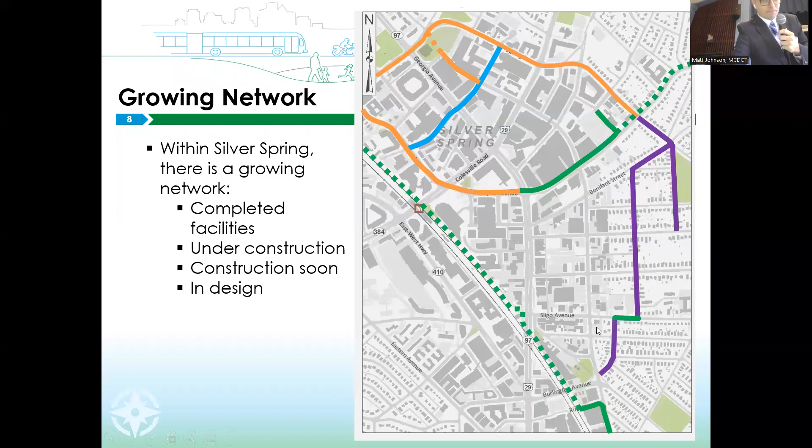And then in final design, we have the Fenton Street cycle track, which is getting very close to final design. We do expect to have a community meeting about that project in the near future. That will connect the north part of the CBD all the way down through Fenton Village to the Metropolitan Branch Trail.

And we have a few other projects that are in planning, including the Dixon Avenue separated bike lanes that will run along Dixon Avenue from Wayne Avenue down to Silver Spring Avenue. And the 13th Street Burlington Avenue project, which is about to get started. We'll have a community meeting about that in the fall, likely. That project we have funding starting July 1st for, and that will help connect South Silver Spring to Fenton Village. So as you can see, there's a growing network of low-stress bike facilities.

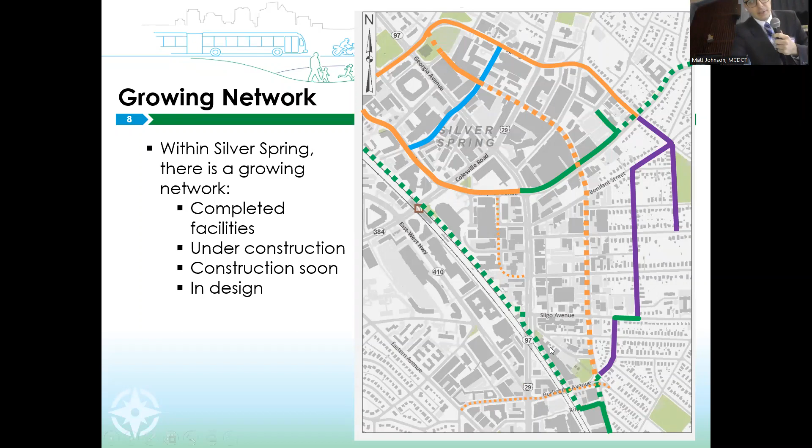And I do want to point out that all of these bike projects are also about pedestrian safety. They're not just about facilitating bike movement. We also always incorporate pedestrian improvements as part of these projects to improve safety for all users. So this is a growing network. It's not just an isolated project. This is part of a larger network.

Now, I've talked about the East Silver Spring Neighborhood Greenway, and those of you who've been involved in the project have probably seen this slide before and have probably heard this definition a whole bunch, but what is a neighborhood greenway, for those of you who might be new to the project? A neighborhood greenway is a street that is designed to give walking and biking priority and to reduce vehicle speed and volume. Tools used to create a neighborhood greenway include signs, pavement markings, speed countermeasures, volume management measures to discourage cut-through trips by vehicles, and also tools to create safe and convenient crossings of arterial streets for bicyclists and pedestrians.

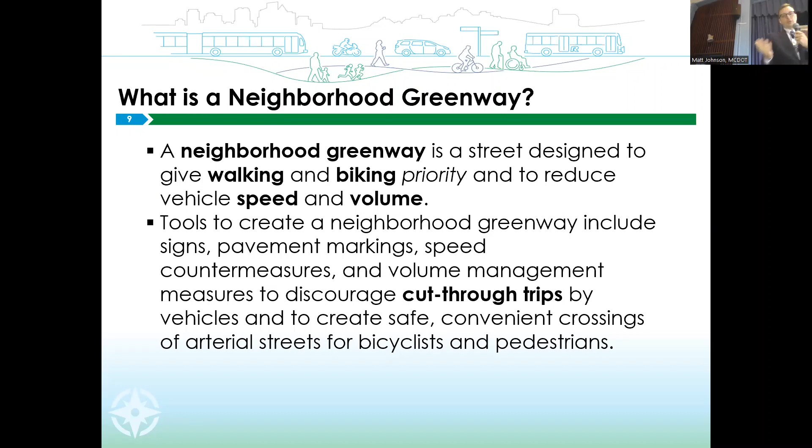So we don't necessarily have to do all these treatments in all the places. It's a toolbox, and we use the correct tools in the correct locations, and also based on community feedback. So these are just some examples of treatments that are used in neighborhood greenways. Things like speed cushions, neighborhood traffic circles, chicanes, but also chokers, curb extensions or bump outs. We also have diversionary treatments.

Now, I want to just go ahead and point out that we are not proposing any diversionary treatments as part of this project. I'm including them on this slide because you may be involved in other neighborhood greenway projects in other parts of the county. We may have diversionary treatments on those projects. We're not proposing them on this project, but those include things like having a partial closure where the street might be made one way at one end of the block. So drivers can't enter, but cyclists and pedestrians can. But the street's not fully one way.

So if you have a driveway on that street, for example, you could leave your house and go away from that closure. Or a full closure where we actually do close the street, kind of make it a cul-de-sac, or a right in, right out, where we make everyone turn right instead of going straight across. So those are some examples, but again, we are not proposing diversionary treatments on this project. I just wanted to give the full context that those are in the toolkit for other projects.

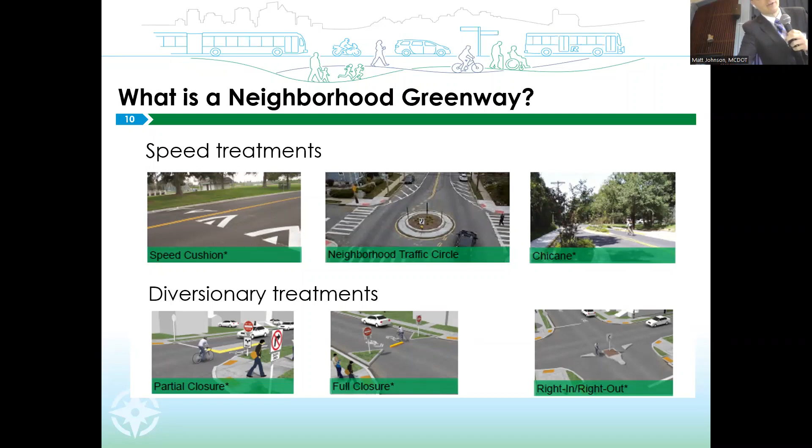And I just want to give an overview of this project. So as I mentioned, we've seen this map before, but this just shows those connections in black at the south and north end to show this is part of a larger network that we're building that connects to other projects.

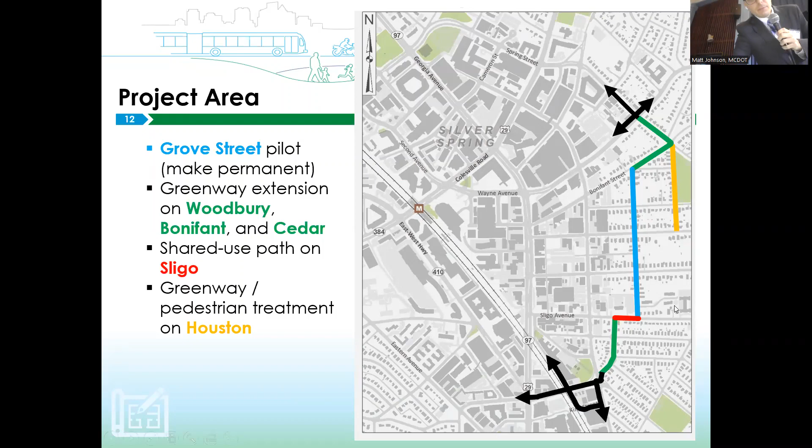So I also want to point out that these are very conceptual plans. We don't have concrete proposals for you right now because we're here to get your feedback. So we have some ideas. We've just talked about some of the treatments that are in the toolbox. The plans you see here have some conceptual ideas of where we might want to put a speed cushion or where we might want to build a bump out. But these are not concrete at this time. We want to get your feedback.

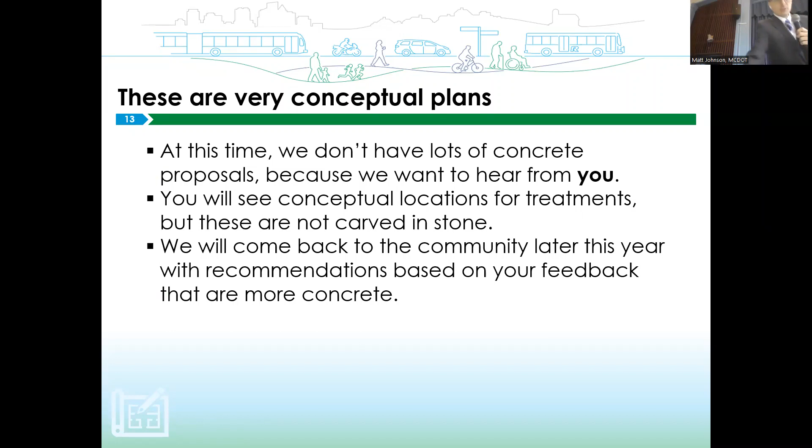We're going to come back probably in the fall with some more concrete plans that you can comment on based on the feedback that we get from this process. So keep in mind that nothing is set in stone at this point. We really are here to get your feedback. I'm going to start at the south end of the project and work my way north. And again, anything you see here, nothing's set in stone. So we would love to get your feedback on individual elements.

So Woodbury Drive does have a connection to the Metropolitan Branch Trail and the future 13th Street Burlington Avenue bikeways at the south end. There's currently a small sidewalk connection from the south end of Woodbury over to the sort of big intersection of Fenton and Philadelphia and Burlington. We have a separate project. I'll show a map of it in just a minute. We have a separate project that is going to reduce the size of that intersection, improve that connection, but this is part of that connection. So it is a dead-end street for drivers, but it's not a dead-end street for pedestrians and cyclists.

We're not really proposing a lot on Woodbury. It's mainly signage, things like a bike route sign that might say bike route, go this way. That way you don't get lost in the neighborhood. Or sharrows to help reinforce to drivers that, hey, cyclists are going to be here and you should watch out for them. So it's primarily wayfinding treatments.

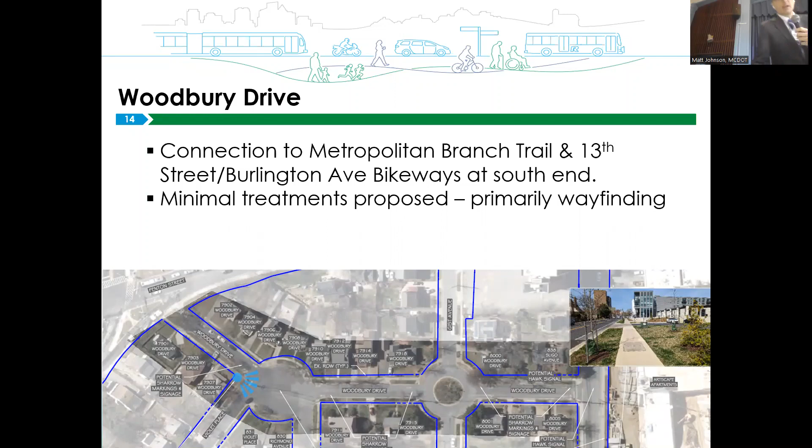One of the things that we are considering, and we would love to get your feedback on, is the same treatment that we did at Gist Avenue to add that green circle, which we worked with the community on several years ago. I was just talking to Bob about that. I think it was before I was at DOT, but it was a couple years ago. For reference, I've been at DOT for 7 years. So if it was longer ago than that, it was before I was on the team.

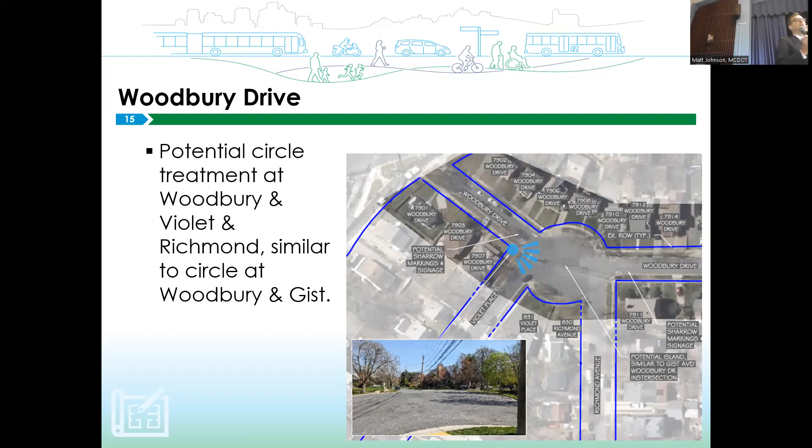But we're looking at a similar kind of treatment at the big circle that is where Violet and Woodbury and Richmond come together. So that might be one option to kind of get rid of that asphalt, make it a little greener, but we want to get your feedback about it.

And then I did mention that other project. This is the Fenton Street Maryland 410 intersection project. It's basically been rolled into the larger Fenton Street cycle track project at this point. But the main goal here is to remove these high-speed right turn ramps, make the intersection a little more compact. It also allows us to put in some stormwater management features to improve our water quality in the area.

And the main point that I want to mention here is the connection is going to be a shared use path connection here between Woodbury and that smaller intersection. And cyclists who want to get to the Metropolitan Branch Trail or pedestrians can use either crosswalk really, but the north crosswalk is sort of the intended crosswalk. And just for reference, north is to the right in this image. So Montgomery College is down to the left, and downtown Silver Spring is off to the right.

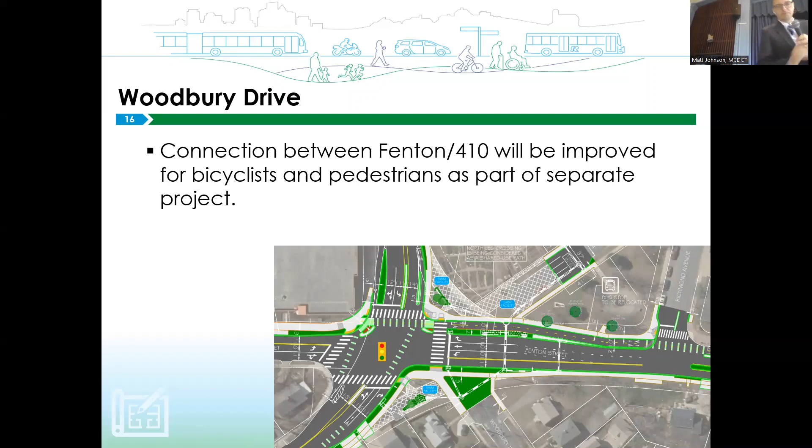Up on Sligo Avenue, there's currently no marked crossing of Sligo Avenue at Woodbury today. And it's a pretty stressful crossing, or could be, given the traffic volumes and speeds. And if you're a bicyclist, Sligo Avenue would be a very stressful place to ride.

Now, I'll say I drove here from Rockville today, and there was a cyclist biking on Sligo Avenue, and he was trying to ride as far to the right as he could so the driver could go around him, but I really didn't feel like I wanted to pass him because it really felt very, very close. So I drove really slowly and let him go on, but it's a pretty stressful place for most cyclists to ride.

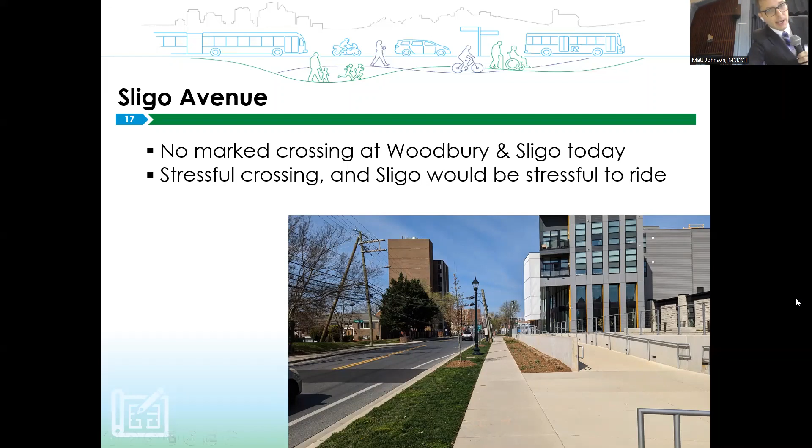So what we're proposing, we have two options, which you can see over on the boards here against the wall to your right, or if you're on the Zoom, you can see that on the website.

Sorry, I have to hide this again. Anytime someone joins the meeting on Zoom, that pops up again.

So that's the issue. So we're proposing to build a shared use path on the ArtSpace side. That's what we call option one on those plans over there. And this would be widening the sidewalk essentially toward the ArtSpace building. So I had some discussions over here before.

Just to be clear, this would not narrow Sligo Avenue. Sligo Avenue, just for cars, what you see today with one lane going one direction, one lane going the other direction, and parking, all that's going to be unchanged. That would not impact the amount of space you have. We're not narrowing the roadway. We're not removing parking with this option.

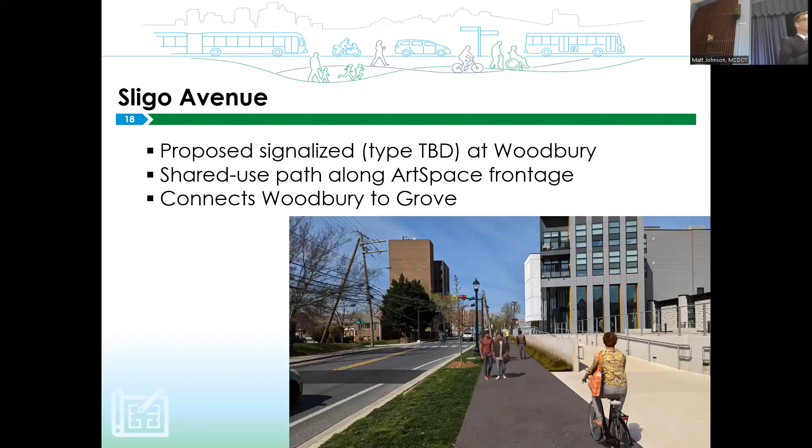And this would also include some kind of signalized crossing at Woodbury, so that people can have maybe a HAWK signal, maybe a flashing beacon, some kind of signal to indicate to drivers that people want to cross here. And that would make it so that you can cross from Woodbury over to the shared use path, go a block on the shared use path, and then make a left on Grove Street, or vice versa, to continue on the Greenway.

Now, there is another option, which we included just for the sake of having a discussion, because potentially it might be a preferable option. So the northern option is shown in green on the screen here, with the crossing at Woodbury. But we also were looking at a southern option where the crossing would be at Grove Street instead. This would require removing all of the parking on the south side of Sligo Avenue between Woodbury and Grove.

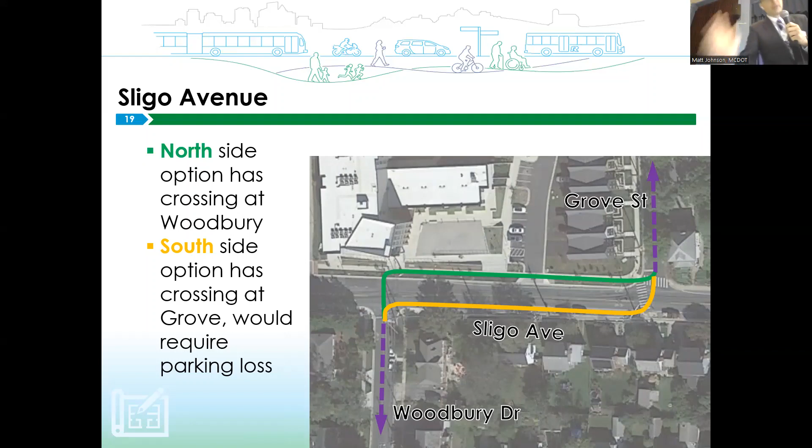So I suspect the community is probably going to favor the north option rather than the south option, but we're here to hear your thoughts. And if you disagree with that, please feel free to let us know. But we're currently operating under the assumption that the north option is probably going to be the option that people like more. But again, we want to hear your thoughts.

As we move on up to Grove Street, these treatments are largely already in place, but they're interim treatments. So you can see here the interim speed hump, the speed cushion here, and also the walking lane. These were never intended to be permanent. They were intended to be temporary treatments that we could use to test out things and see how it worked and see how the community liked it.

And they can't stay here forever because they're not super resilient to snowplows. Like I think in Miami, these things probably could stay forever, but up here we do get snow occasionally, and the snowplows do a lot of damage to stuff that sticks out of the roadway. So we want to replace these with things that are going to be resilient and will last long term.

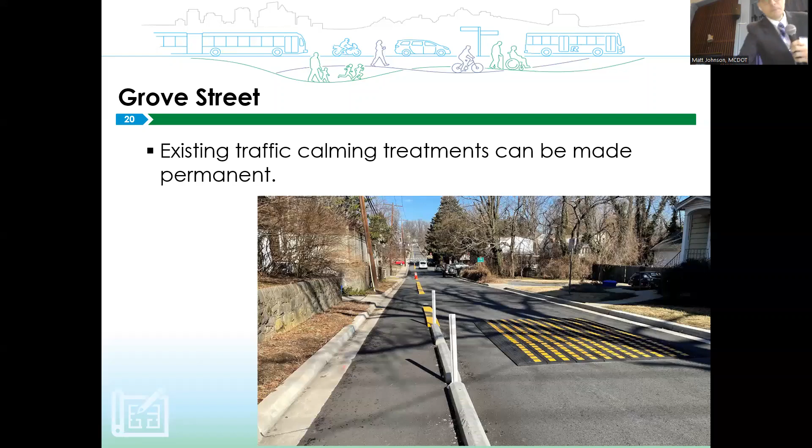So we're not saying that everything that's out there today has to stay. We'd love to hear your feedback about things that are working, aren't working, things you think maybe, hey, if you move this over 50 feet, it would work better. Those are the kinds of comments we would love to get about Grove.

We are planning to remove this mini roundabout, although again, if you think it should stay, we'd love to hear that too. But the intersection is just a little bit too small. We wanted to try it out and see how it would work, but it's just a little too tight to make it work in this instance. And we are planning to remove this. But again, if you disagree, please feel free to let us know about that as well.

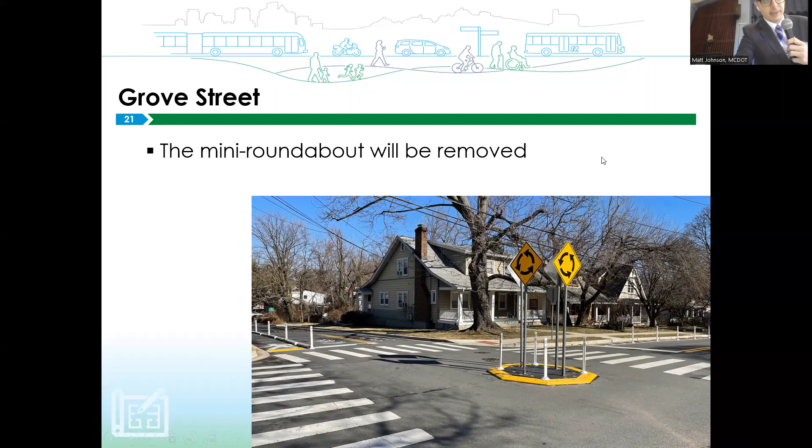And the walking lane, we are proposing to convert the walking lane to a sidewalk. In order to create additional operating space for the fire department, we are proposing to basically raise the walking lane 6 inches and also move it back about 1.5 to 2 feet. So that would take some of the grass behind the curb, but it's all land that's in the right of way. We're not proposing to acquire any land. We would use the existing county right of way.

The reason we had to use these low profile barriers is that theoretically there's enough space for the fire access. But the fire department was concerned that if someone had a large truck parked on the street, or if someone wasn't parked against the curb, they might not have quite enough space. They said, we want something mountable. Well, that means that anybody can mount it, and I'm sure you have seen cars driving with at least 2 wheels in the walking lane. I'm sure everyone's seen that.

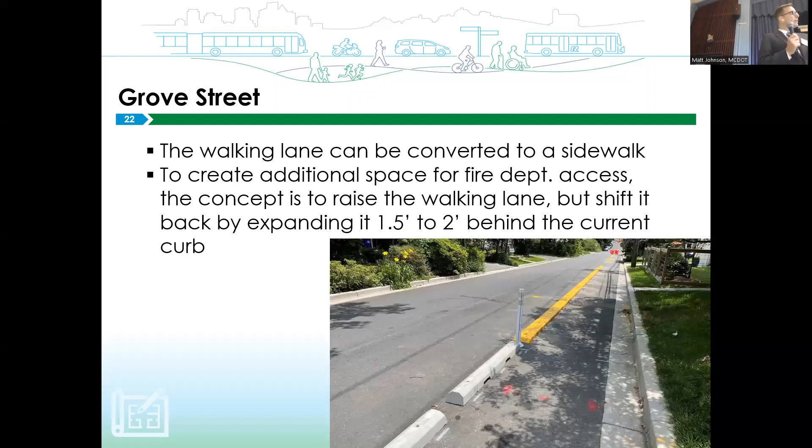That's not the intended way that it's supposed to work, but if it does happen, that would not happen with a 6-inch sidewalk. But we can't just raise the existing walking lane up 6 inches because then there wouldn't be enough space for the fire trucks to mount it. So we need to move it back a little bit to make it work, and that would require us to be a little bit behind the curb.

So here's a picture showing existing Grove Street, and then here's a rendering showing the proposed sidewalk, which again will be pushed back about 1.5 to 2 feet. And it may vary based on what's behind the right-of-way line. So we're flexible. If there's some issue that we can't work around, a utility pole or something, we might be a little flexible in that design. We don't have a concrete design at this point.

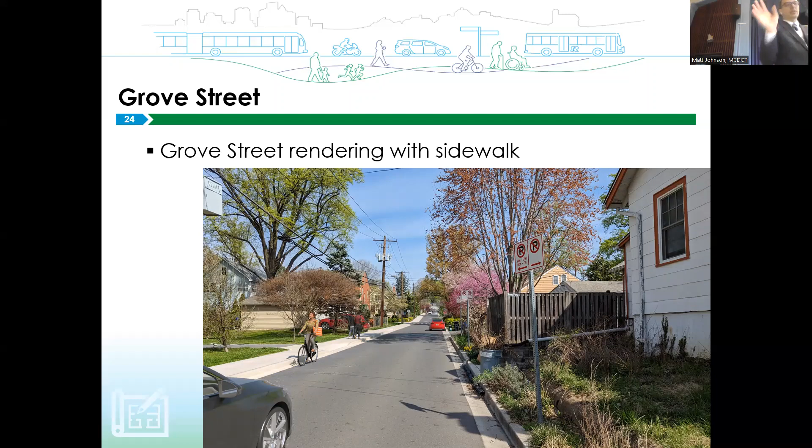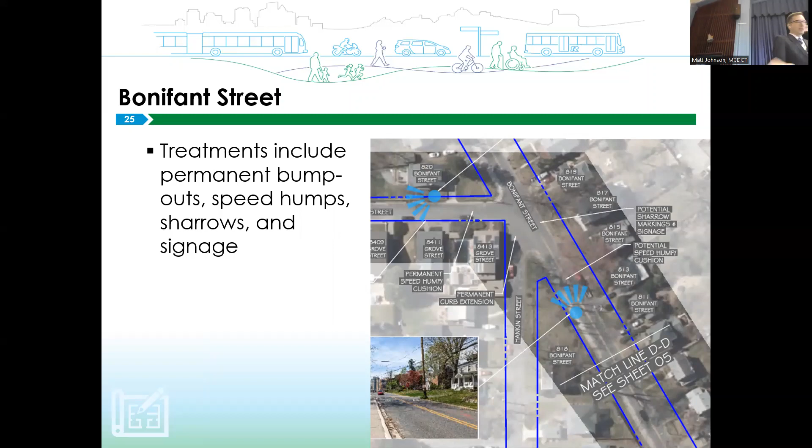This is all conceptual. As we move on up to Bonifant Street, we are proposing on Bonifant Street to make those bump outs, the curb extensions, which are made with paint and flex posts throughout the corridor, not just Bonifant, making those permanent. Adding speed humps, sharrows, and signage along this corridor, or upgrading it if it already exists. So here's an example of one of those paint and flex post bump outs.

This is a really long crosswalk if you're walking on the south side of Bonifant Street. It used to feel really exposed. I think it still feels pretty exposed. Just for reference, we're looking east, northeast on Bonifant Street. So this is if you're walking along the south side of Bonifant going sort of towards Cedar. This is Grove on the right and Hankin going off toward the middle distance there. And it's a really long crosswalk.

So building a little concrete island there, it wouldn't be an island, it would be a peninsula, but building a little concrete curb extension there so pedestrians have an actual place to be safe from traffic, and then speed humps. Over on Cedar, one of the things that we are considering is flipping the parking over to the opposite side of the street. I know there was some debate about this years ago when the contraflow bike lane was installed.

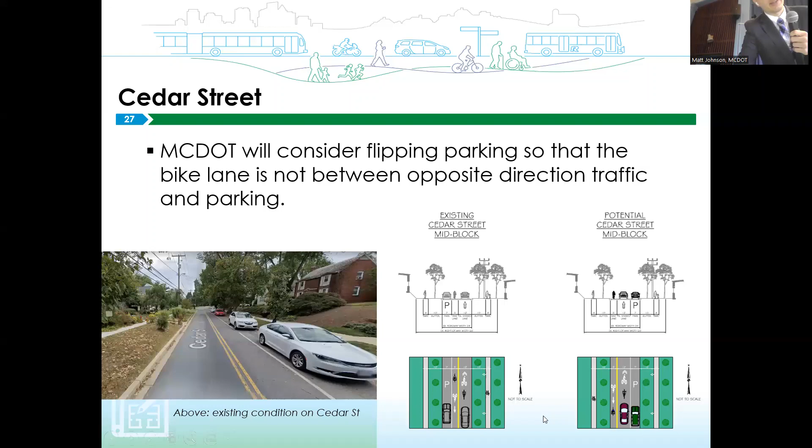So we have an option, and again, we want to hear from you. It's nothing set in stone. It would flip the parking to the other side. It would allow the bike lane to be against the curb. It would still be the same amount of clear width for the fire department to come through. It's just flipping the parking to the other side. And I think Dave said there's actually a little bit more curb space. We might be able to fit a little more parallel parking on the opposite side of the street than is currently present. But again, we want to hear your feedback.

And then finally, we get to Houston Street. Houston, we're looking at neighborhood greenway treatments here, like we have on Grove Street.

One of the things that we heard from people who live on Houston Street was once the Grove Street pilot went in, they saw more traffic on Houston Street. We've heard that from a lot of people. And we did actually do counts, and that is borne out by the data. The number of cars that increased on Houston is much less than the number of cars that decreased on Grove.

So it's not like everyone who's driving on Grove suddenly started driving on Houston. A lot of that traffic did not come into the neighborhood altogether. Some of that is attributable to the pandemic. Some of it's attributable, we think, to our treatments. But be that as it may, we never set out to solve a problem on one street and move that problem to another street. So we want to look at Houston Street.

One of the things we've heard is people walk to the park there. There's no sidewalk, so we want to look for the ability to put in a sidewalk along Houston Street and also traffic calming. So I'm going to quickly go through the survey results.

This survey was done last year, May of 2022. If you came to our Grove Street meeting in May of 2022, you've seen all these slides before. This is not the full presentation, so if you want the full presentation, go to our webpage and look up the May 2022 presentation. But this is just to go through some of the data that we got from people based on stage 1, which is currently still in place.

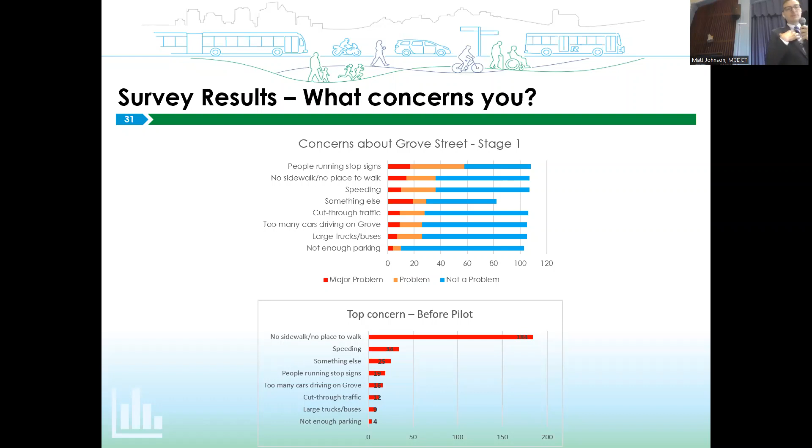We're looking for what other kind of treatments. With the speed humps, what we're trying to do by putting them close to the intersection was to slow people down so they say, hey, I'm already going slow, I might as well come to a stop here. Maybe that's not working. Maybe we need some more enforcement. That's something we don't do. That's the county police, but we are willing to work with the community to find solutions to that. We did ask people, and I show this because this is not just about Grove Street, but about the other streets in the corridor.

So we asked people before we did anything and during stage 1 about their walking, biking, and driving habits. And 50% of people said they walk on Grove more than they did before we installed those treatments. About 40% or so, maybe a little more than that, about the same. And very few people walk less. Biking on Grove, about 20% bike more, about a third bike the same amount, and very few people bike less.

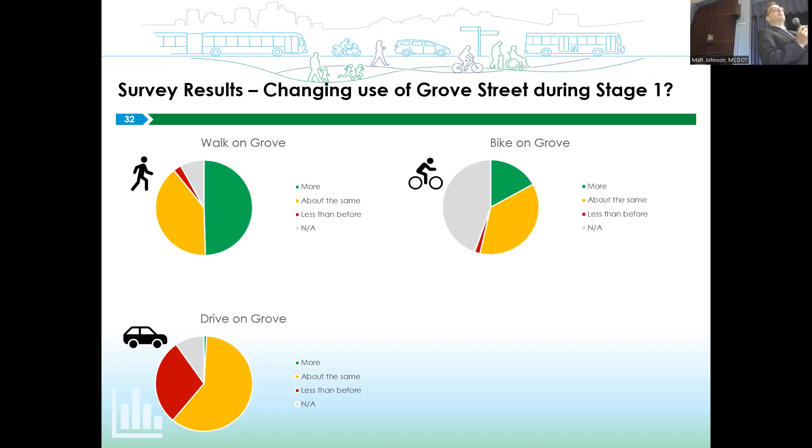And then driving, this is kind of what we expect, a little over 25% of people drive on Grove less than they used to before we did the treatment. A lot of people driving the same amount, but it's still a reduction. And this survey was mostly people who live in the neighborhood. So if you're thinking about the people who are cutting through who live in Burtonsville or Columbia or somewhere else, they're not captured in this. They might be driving on Grove about the same, or less. We don't know about them because they weren't captured. This is mostly local residents who did the survey.

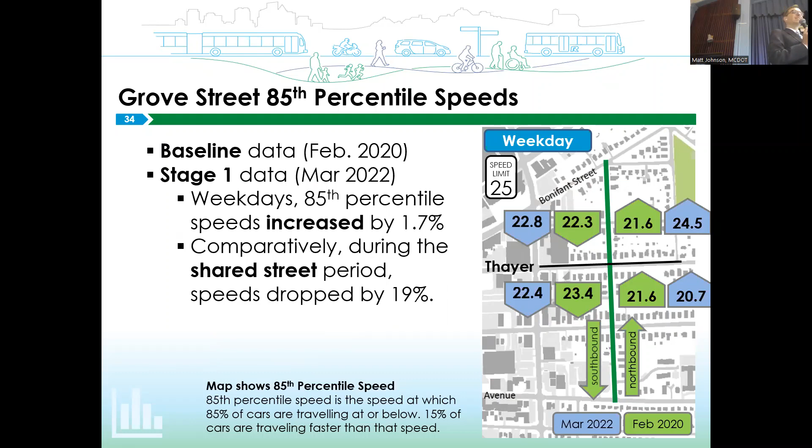This data basically shows we didn't see a big difference in speeds. We did see a big difference in speeds during the pandemic when the street had the road closed sign, but during stage 1 treatments, which are currently in place, it's pretty much marginal. We actually saw a 1.7% increase, which is within the margin of error. However, we did see a big difference in volume.

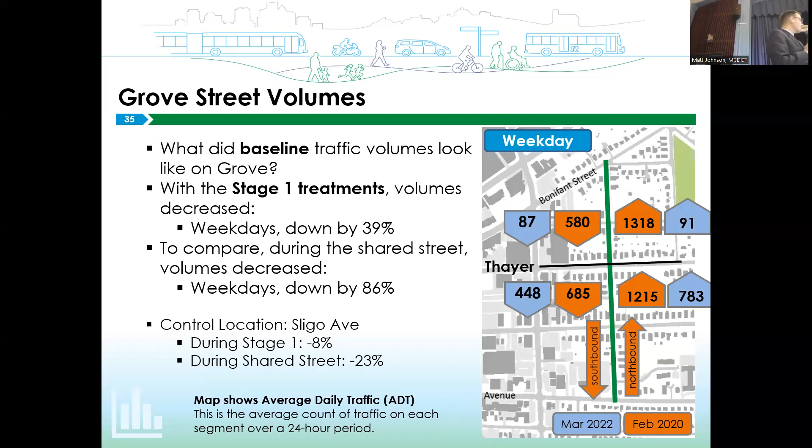So you can see that between Thayer and Bonifant, before the pandemic, February 2020, we had 1,318 vehicles on average every day, dropped to 91. So that's a huge drop, right? It's a huge drop in traffic volumes.

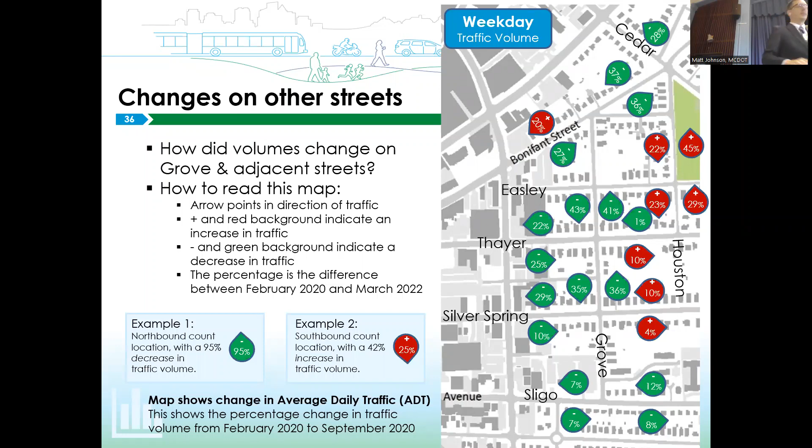We're trying to suss out a little bit what's the difference from the pandemic, because our first counts were before the pandemic. So our control locations down on Sligo Avenue saw a reduction of about 7%. On Grove, we saw reductions like 43, 41%. So some of this is attributable to the pandemic, but some of it's also attributable to other factors like what we did on Grove. But because of the pandemic, we'll never really know. There are a lot of other reasons to not like a pandemic, but one of them is it screwed up my experimental data. That's a very minor reason, but unfortunately the timing's there.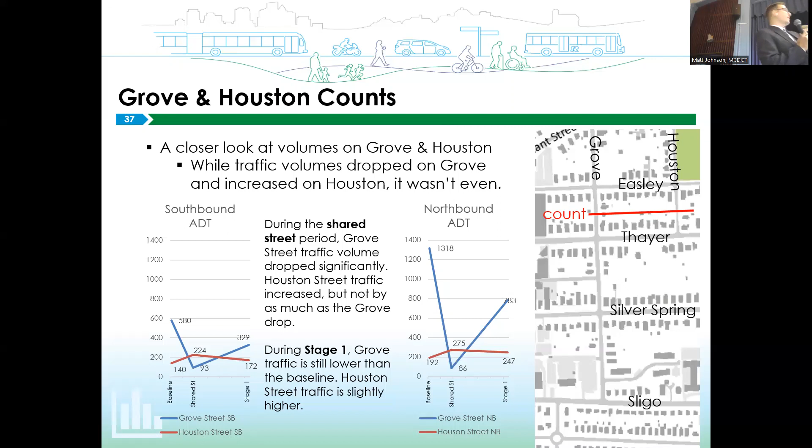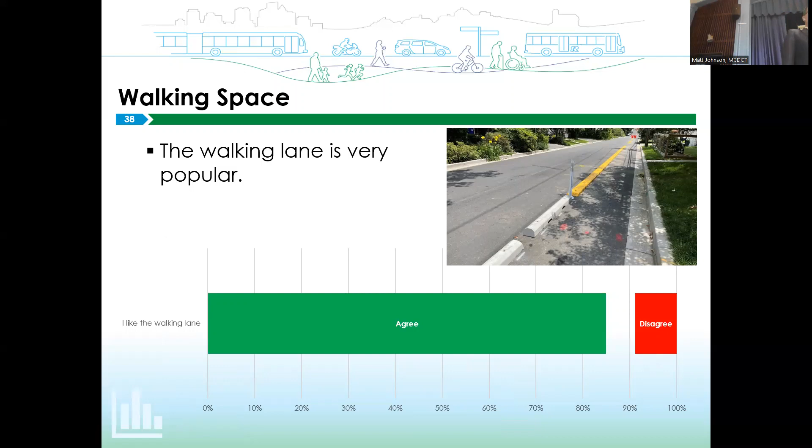So we're wrapping up here. I do want to mention that the walking space is very popular. We surveyed people and asked them to agree or disagree with the statement, I like the walking lane. And 84% of people said they agreed with the statement, 8% disagreed.

So it's pretty popular. We also asked people about whether we should build the sidewalk behind the curb, build the sidewalk where the walking lane currently is, or just keep the walking lane as it is. And all of those had similar levels of support. None of them stood out. They're all equally positive. People want to keep some kind of walking space. They don't seem to care a whole lot about which kind.

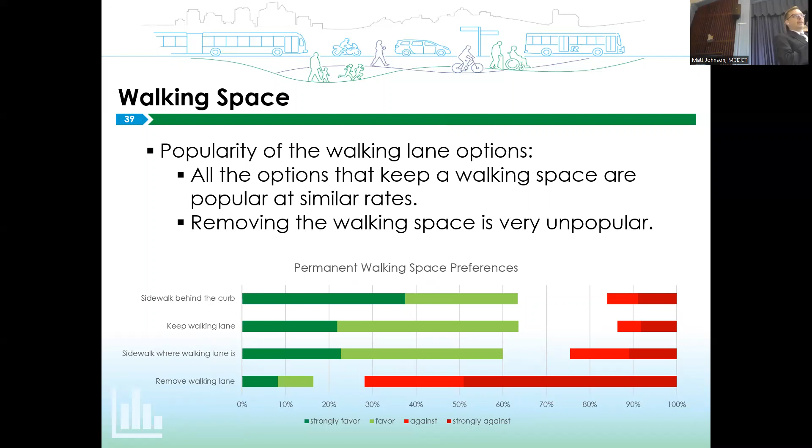We also asked people if they wanted to remove the walking lane, and 70% of people said do not remove the walking lane. That was their preference. So clearly we want a walking space on Grove. What kind, we don't know.

So next steps. Based on your feedback, our team is going to work to develop more concrete plans, and we're going to come back to the community in the fall of 2023 to present those proposed treatments to you and get more feedback. So even when we present these, it's not the end of the world. At the end of the process, you can still ask for changes.

So with that, we're going to move into the public comment and question and answer period. I just want to ask that everyone please be respectful of the other attendees. Give others a chance to speak by keeping your comments or questions concise. If you're here in the room and you want to ask a question or make a comment, you can raise your hand. You actually raise your hand, not click the button.

If you're on the Zoom, type your question into the question and answer field, and those will be read out by Dave. And I am going to repeat everyone's question because the people on the Zoom cannot hear you, they can only hear me. So I'm going to have to repeat the question. So just bear with us as we go through that.

Anything you want to say about the East Silver Spring Neighborhood Greenway is fair game. We'll take any comments. But it would be particularly helpful for us if you could think on specific elements. This is of the pilot, this should say the project. So any of the specific elements we've talked about that you like or don't like, how you feel about the stage 1 treatments that are currently in place, which ones you think should be made permanent or modified or removed,

what your preferences are for the permanent walking space along Grove Street, and what issues you're seeing on the other streets, Woodbury, Sligo, Bonifant, Cedar, and Houston, that you want to tell us about, and just anything else you think we should know about the project. So we're going to move into that process.

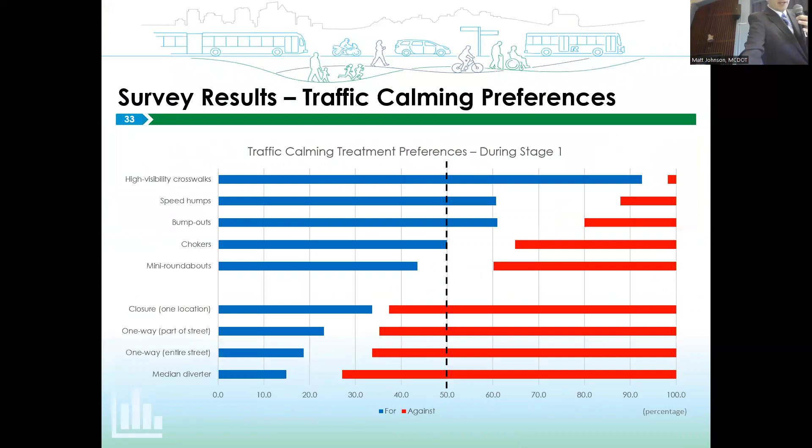It's making this permanent. So when a snowplow comes through here and knocks these flex posts down, you still actually have a refuge there because there's not flex posts there anymore. There's an actual concrete curb there, right? So it's a place for pedestrians to cross. And exposure is absolutely a big deal for pedestrians. That's what we call the length of time you're out there when you're crossing the street. So when you cross Georgia Avenue, for example, imagine you're trying to cross 6 lanes and there's no place to stop in the middle.

You have to go all the way across all at one time. That's a lot of exposure. Put an island there, you cross 3 lanes, you have a place to wait, you cross 3 lanes. That's reducing the exposure. Really reducing exposure is reducing the number of lanes, reducing the width, right? We can say we have a 14-foot lane, we only need to have an 11-foot lane. We can reduce that by 3 feet, make that exposure less, makes it feel a little tighter.

Okay, so the comment is that it's too difficult to make that right turn from Grove onto Hankin with the flex post there, and would be similarly difficult with the actual curb extension. So that's the comment. So thank you. I see a hand here, and then after I click here, I'm going to go back to the Zoom. But yes, in the white shirt.

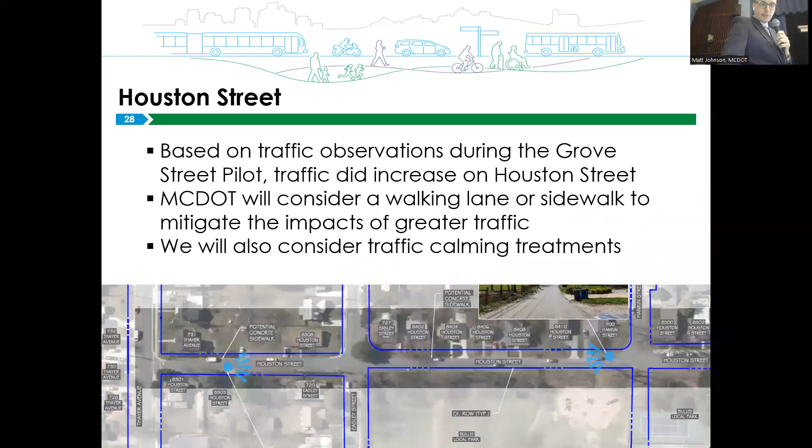I don't know if we have any pictures of it in the presentation, but there is one on Grove. You can't quite see it here. It's on the 8400 block, which is the block between Easley and Bonifant, the northernmost block there, just past Pointer Farm. There's a couple houses there, and it's got flex posts where the parked cars are. That's the choker to make it feel narrow. So we do have one of those on Grove now.

Yeah. Oh, I don't know who raised their hand first. In the mask on the aisle here.

Yeah, so the comment is this is a resident of Twin Holly, really likes the idea of building a sidewalk and likes the speed treatment, thinks we should do some more speed treatments on the block between Sligo and Silver Spring, especially the first half where traffic tends to go a lot faster. They turn off at Sligo and they haven't quite gotten to the neighborhood mindset, I think is maybe what I would characterize that as. And you also said you were a little upset that we didn't continue with stage 2 of the pilot, which was to do the diversionary treatment.